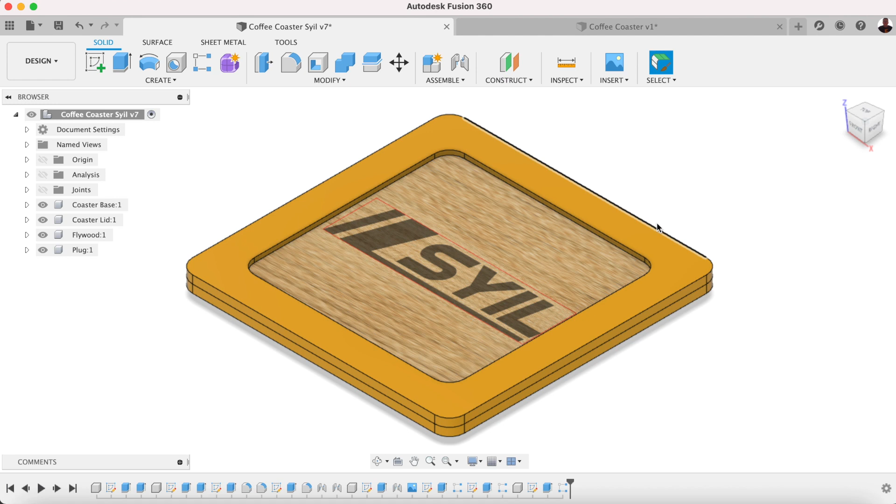Okay, let's get started modelling this 3D printed and laser engraved coffee coaster. Now the first thing you want to do here is to create a new design, and we're going to save this here. We're going to call it demo and save.

Rightio then. First of all, because this is an assembly, we need to click on the parent file up the top and create a new component. We're going to call this one base and click OK. We're going to create a new sketch and we're going to click the ground plane.

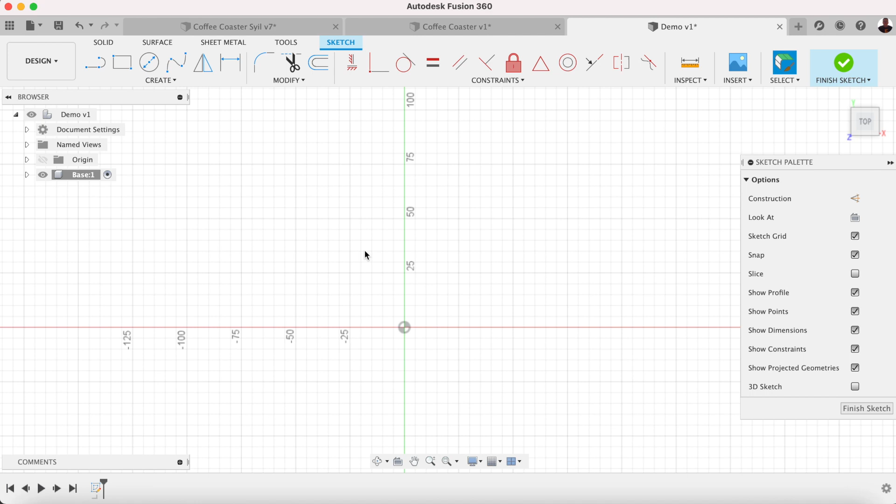And we're going to want a rectangle. We're going to use a center rectangle here, snap to the center and drag out. Our model is going to be a physical size, I believe it's 110 by 110. Enter. And fit that on the drawing. We're going to do an offset chain and bring that in. And that's going to be -6.5.

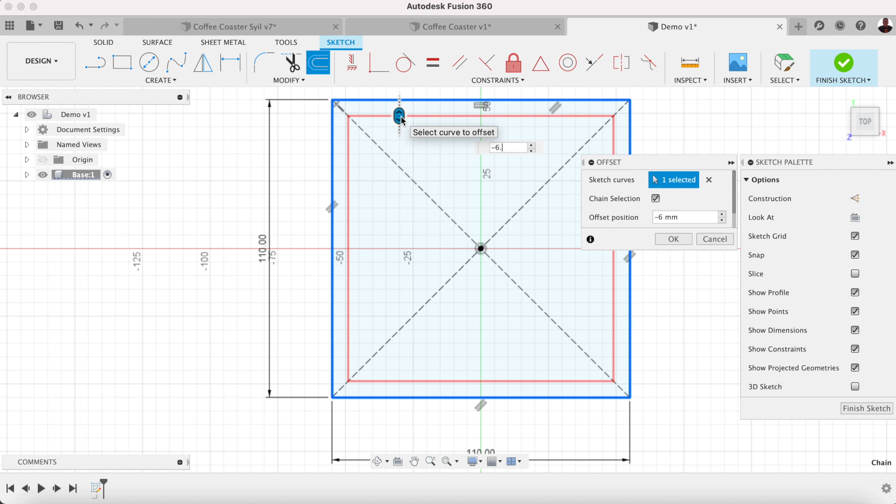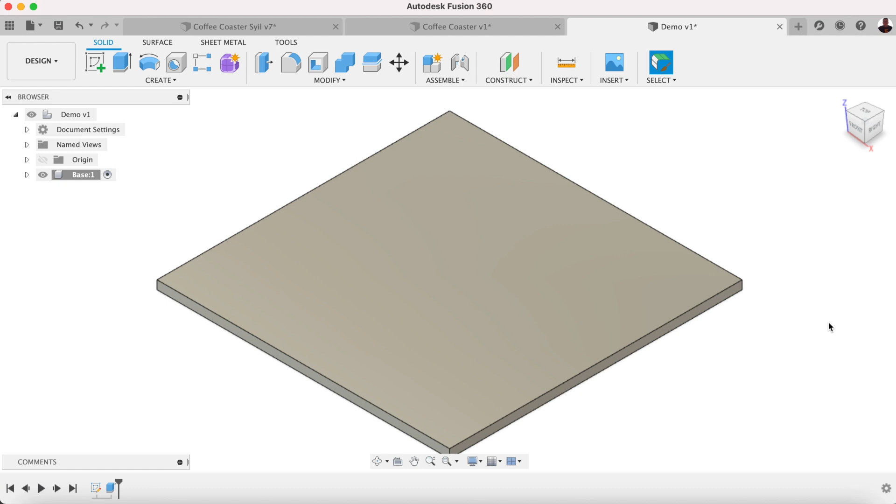We can now finish sketch and we can extrude that, E for extrude. And we're going to pick both of them and we're going to go down negative, I believe -3.25. And click OK. We need to activate that sketch that we did, so let's expand those and activate that and press E for extrude and pick that middle one and drag it down here. -1.5. So we can turn that sketch off now and collapse those columns there.

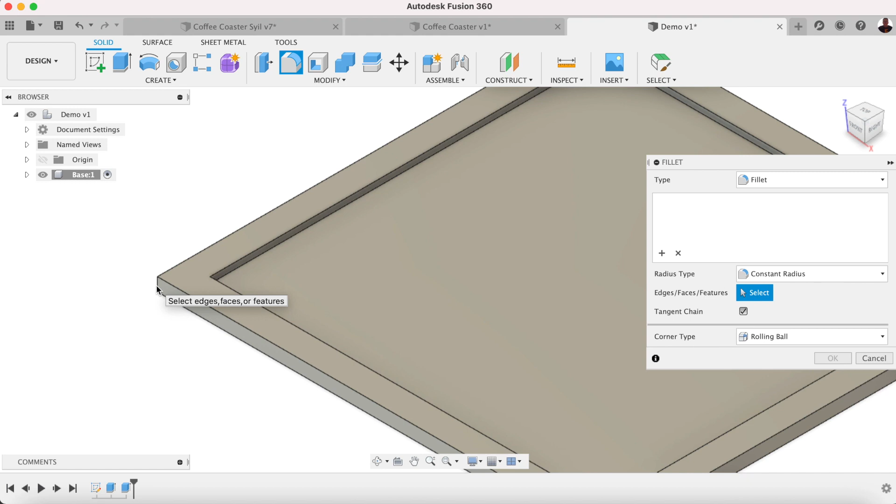We need to put a fillet on the outside edges. So zoom in. Sometimes it's easier if you zoom in to pick up your edges. In SolidWorks, you used to be able to click one edge and it would chain around, but Fusion doesn't seem to do that, or I haven't sorted it out. We want a 6mm fillet on the outside. We're going to fillet that 3mm on the inside.

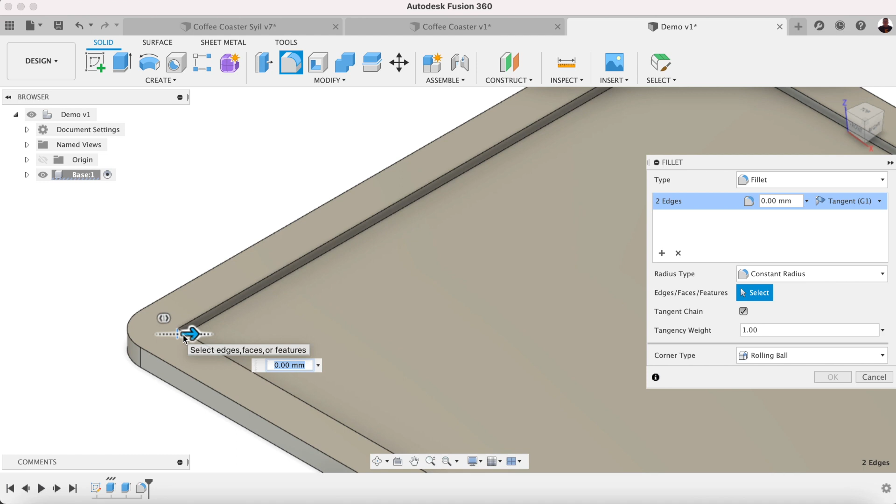So 1, 2. If this doesn't work for you, make sure that you hold the command key on a Mac or the control key on a PC. I'm doing this without holding any keys down at the moment, so 3mm on there.

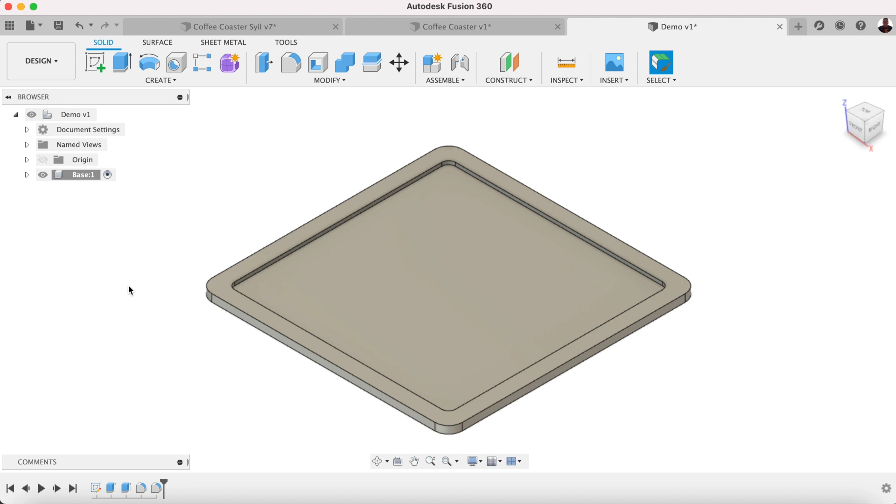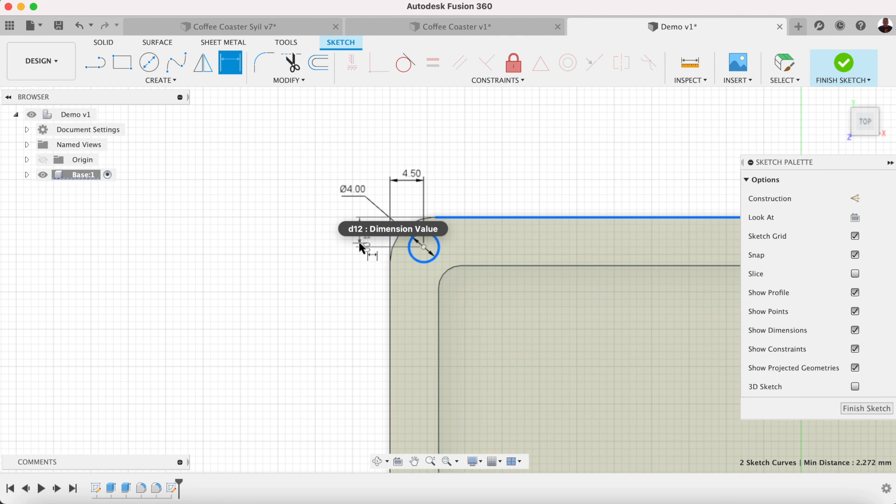Alrighty, so now we need to put in our holes. That will be our locating dowel pins that we'll also 3D print, so new sketch. Click that top face there, C for circle, and try not to snap it to any geometry. This will be 4mm, and it's going to be 4.5 in from the edge, and 4.5mm from the edge on the way down as well. Okay, 4.5, and we can finish that sketch and extrude that now. So we want an extrude cut to -2.5.

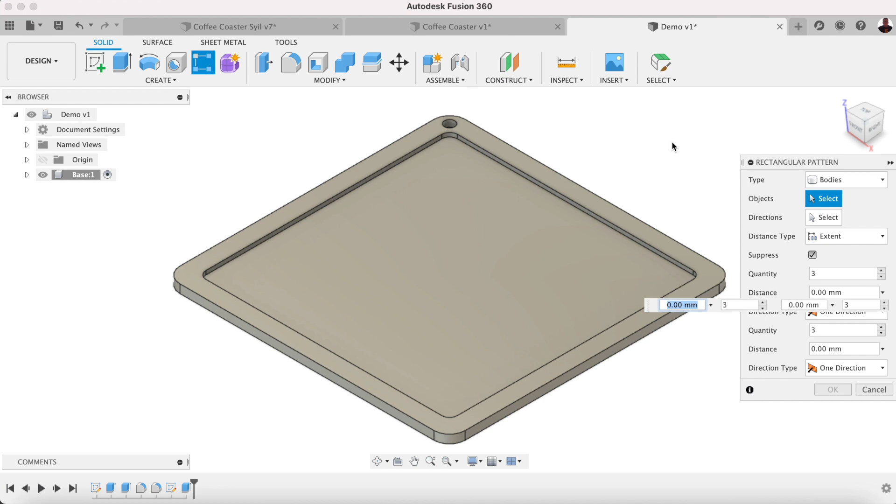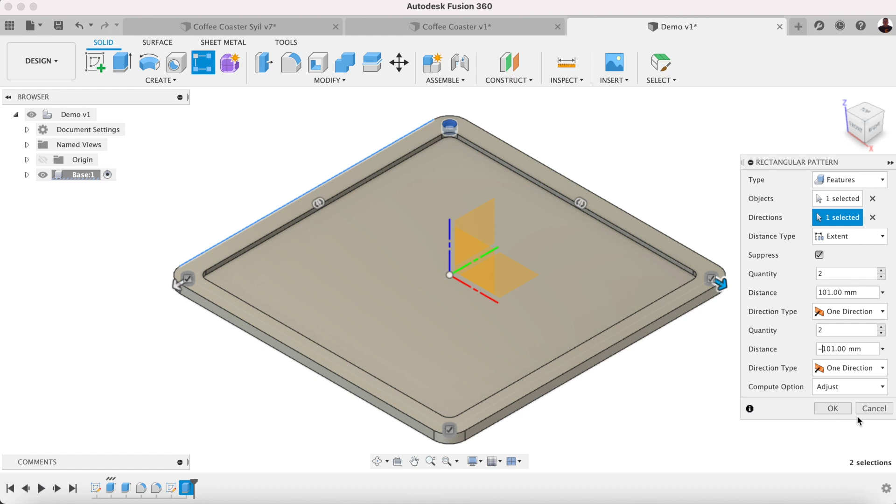Okay, so we're going to do a rectangular pattern now, and this will be a feature, and we pick that extrusion in the timeline. Then we pick the side edge here and we drag down. It's going to be just 2 at 101. And we want to go the other direction as well, and that will be 2 at -101. Oopsie daisy. Got an 8 in there. 101. Click OK, and we should have our 4 holes in there now.

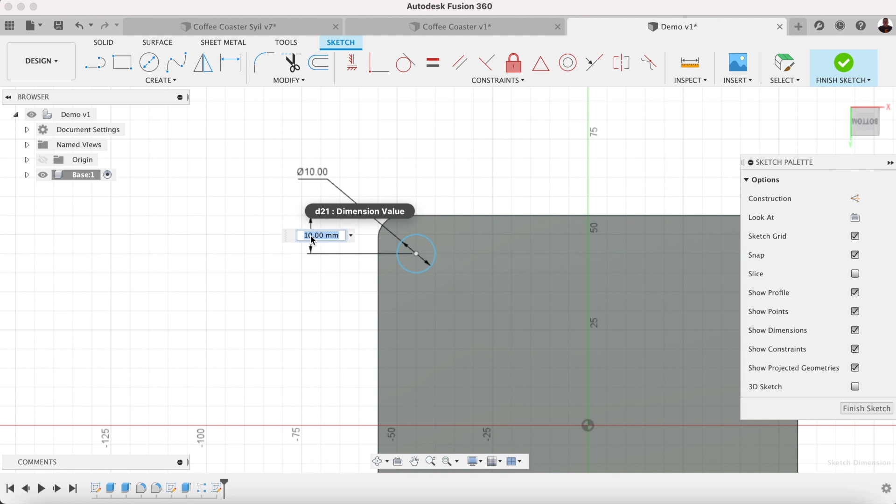Okay, so we're going to flick around to the bottom now, and we're going to put the little feet on. So new sketch, C for circle, and let's just put a little circle on here. This will be 10mm diameter and 10mm from the edge as well, and 10mm up from here. E for extrude, and that will be 3mm as well, and it will be a join. So we can have a look now. We've got 1 foot on there.

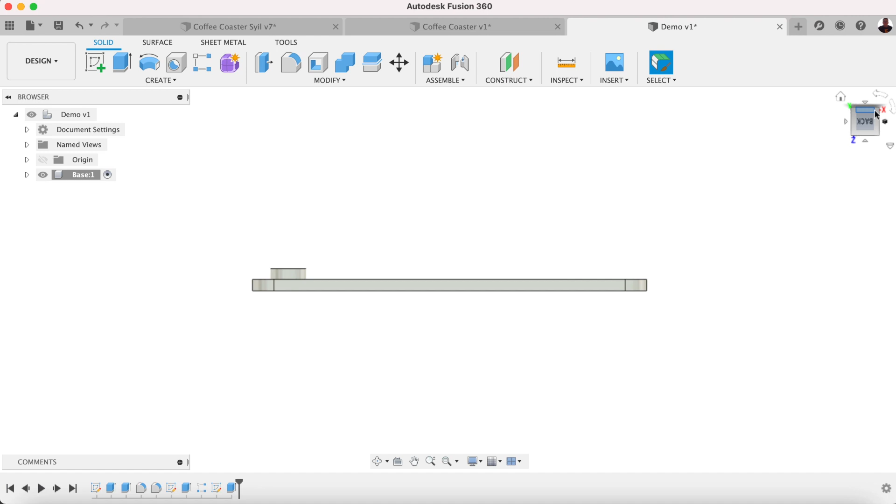Okay, so let's come back around here and let's do a rectangular pattern again. It's always easier to do a rectangular pattern using the feature rather than doing it in the sketch. That's the way I was taught by my good buddy Kevin Alexson, as it creates a Boolean operation, I believe.

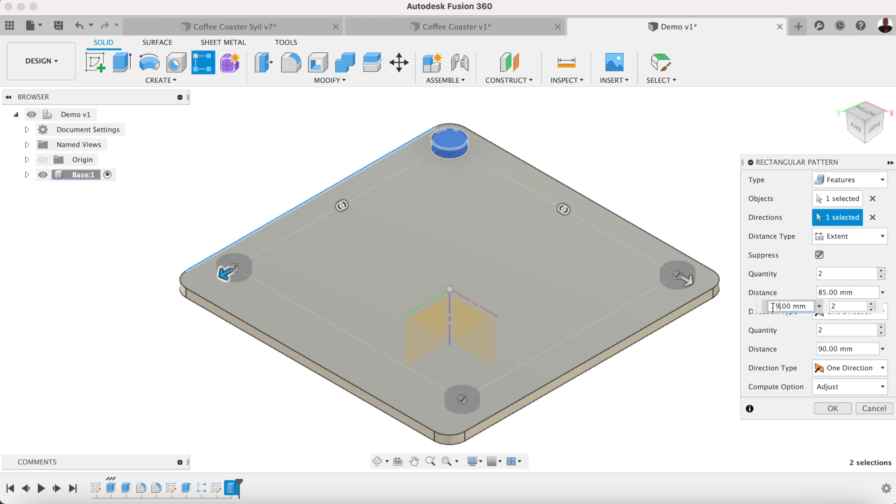Okay, and this will be actually 90. So 90 and here, and the top one as well. So this one here will also be 90, not 85. And there we have it. There's our feet on there, and we can come back over now.

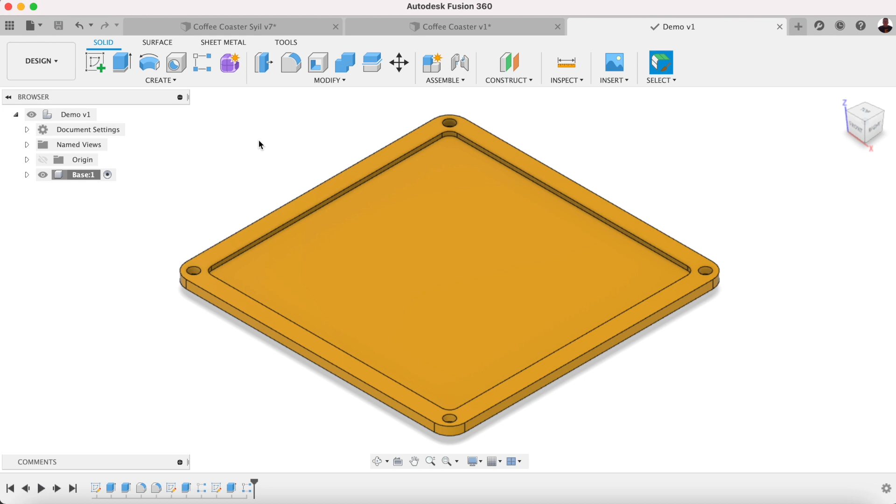So let's apply a physical material appearance to this now, and we want to type in yellow plastic, glossy plastic yellow, and we can just drop that on there and click save. Right, so let's do the plywood base. So once again, right click up the top, new component. We're going to call this one 3mm plywood.

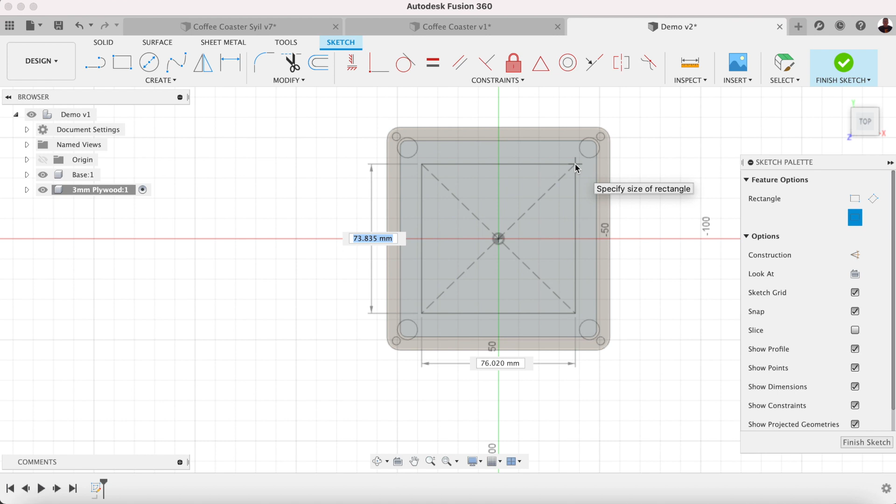We're going to create a sketch. We're going to click that face there, zoom out, R for rectangle, center rectangle, drag out. This will be 95 by 95. Okay, so we can extrude that now, and that will be extruded up in a positive direction, 3mm.

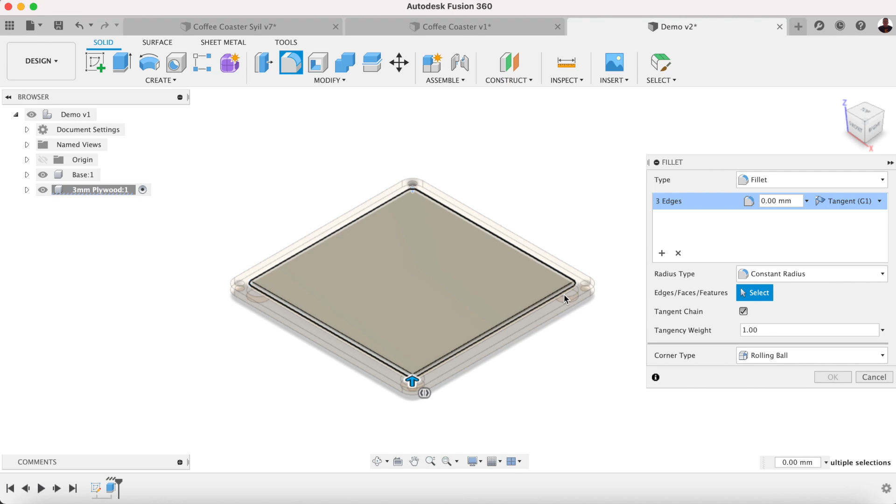Let's put some fillets on those now. These will be 3mm fillets on the corners of the timber. Remember to zoom in if you can't see it or can't find it. And over here, and that's going to be 3. Back to our ISO view.

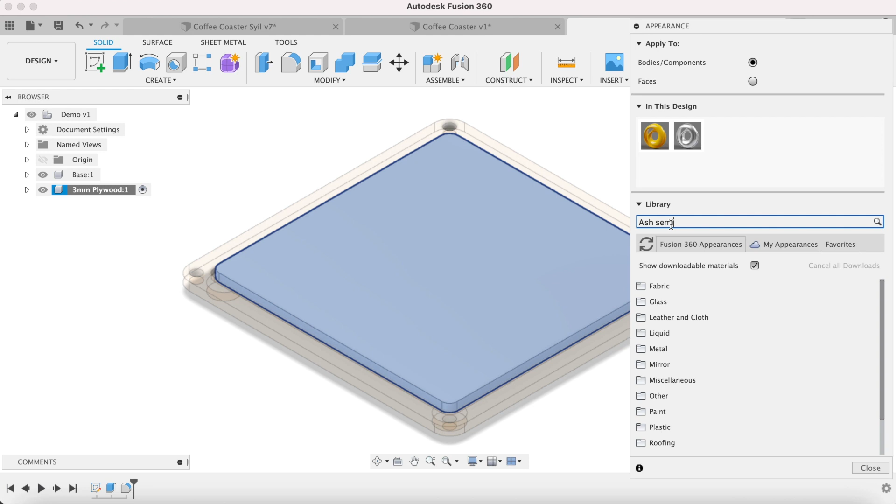Alrighty, so let's put a physical material on that now, and let's just type in here, I believe it's ash semi-gloss. Hit search, there it is there, we can drag and drop it straight on the timber. Okay, let's put our little icon on there now, our decal, and insert it from your computer.

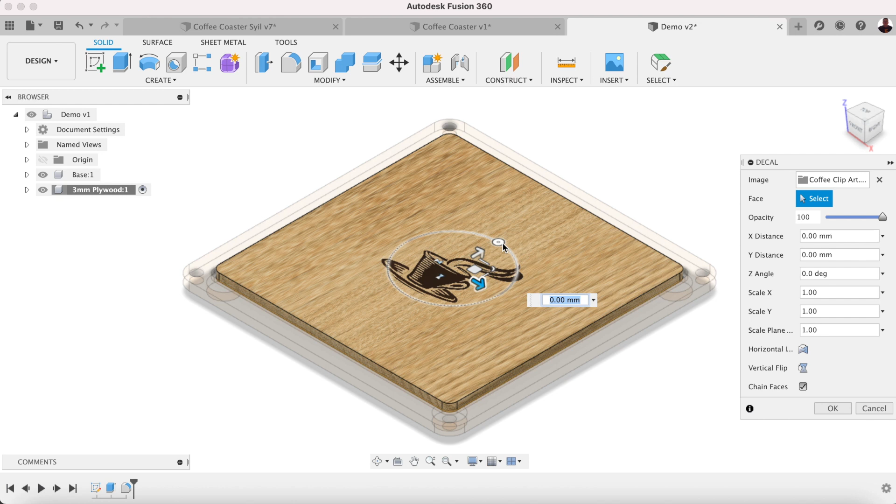Pick that top face there. I'm going to rotate mine around so it goes with the grain. May have to pop in on a top view here just so we can get it roughly in the center where we want it and to the size we want it as well. Not too big because we've got the outer lid to go on. It's going to look something like that. Okay, so now we hit save.

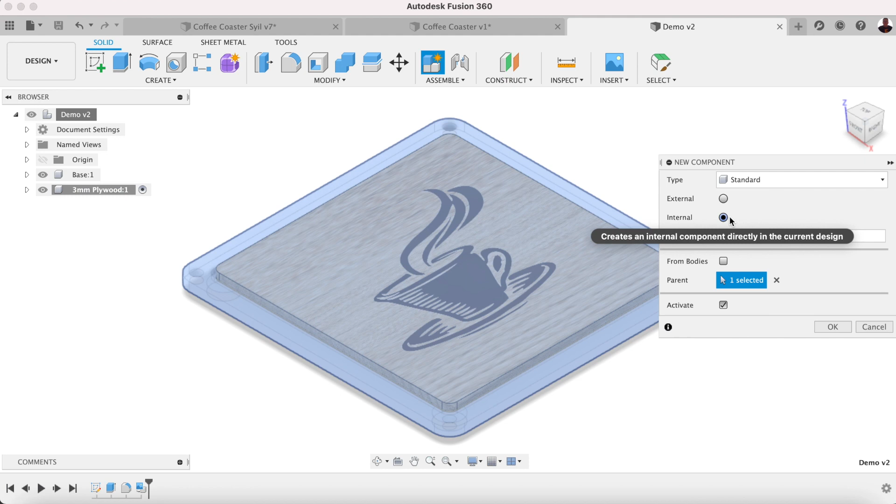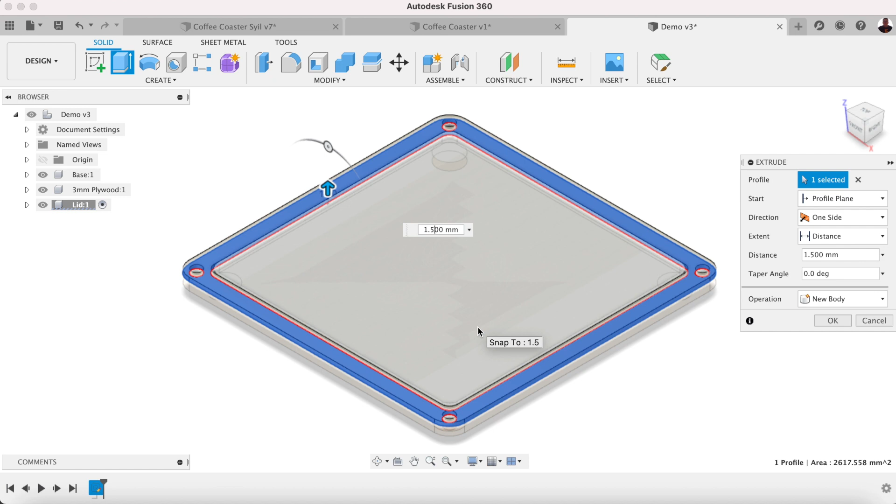Let's start on the lid. So once again, new component, and this will be lid. And we're going to pick a new sketch. We're going to pick that top face there, and pretty much while I've got that highlighted like that, I'm going to go extrude, and I'm going to extrude that up 1.5. Alright, there we have it, and that should be level with the top of our ply now if we just check it. Yep, it certainly is.

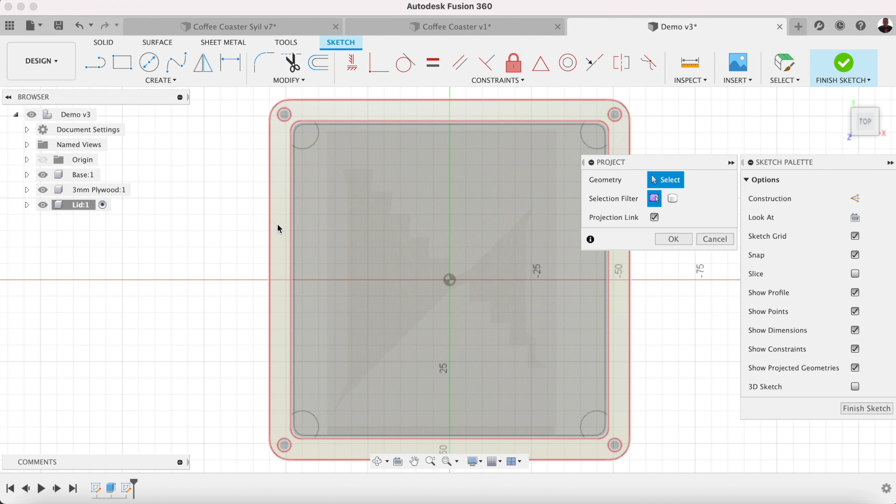Alright, so now we're going to create a sketch again and pick that top face. And this time now we're going to do a project include. So create, project include, we want project. I want to capture those edges there and click OK. Now I want an offset from that one there and drag it in. And that offset is going to be negative 12.5. I'm going to click OK.

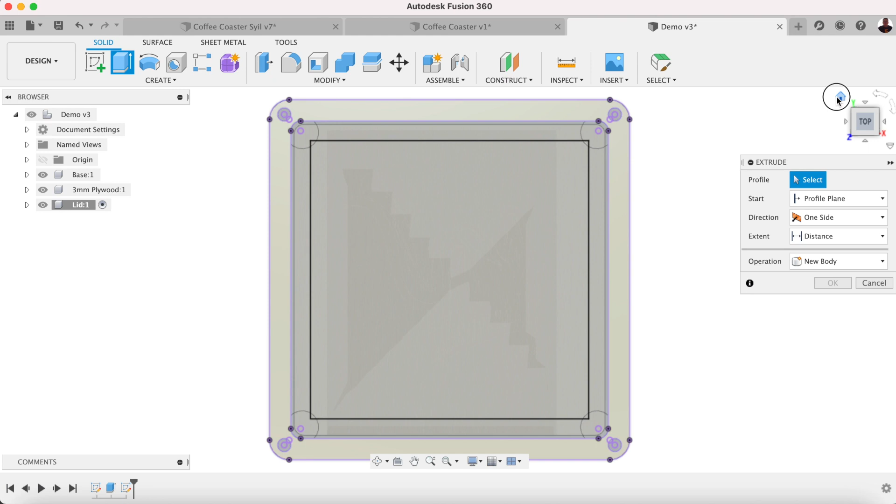We can now extrude all this information here that we've gathered. So we're going to pick that and the little round circles as well. Okay, and we can drag him up, and we're going to type in here 1.75 and click OK.

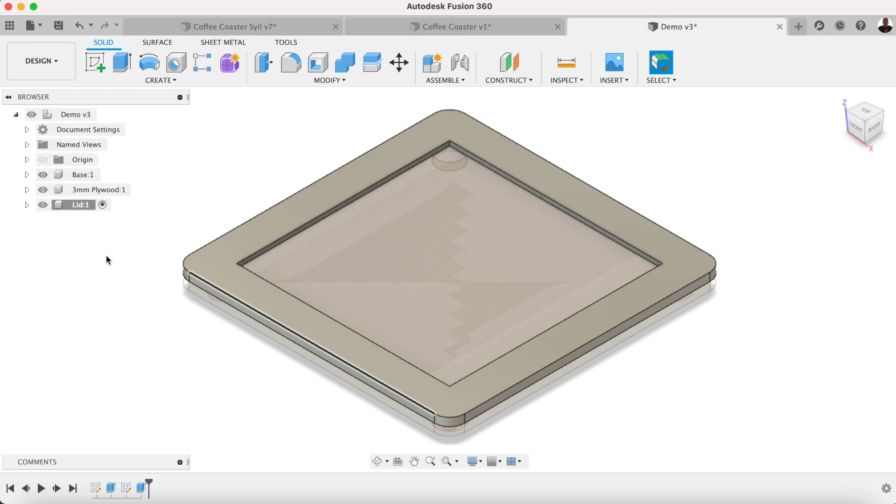Alrighty, so let's put a physical material on that as well, an appearance, sorry, and we'll drop this into the tree on that one there. And if we activate this at a parent level, you can see I've got most of my components. Nothing's locked in yet, so I can undo that.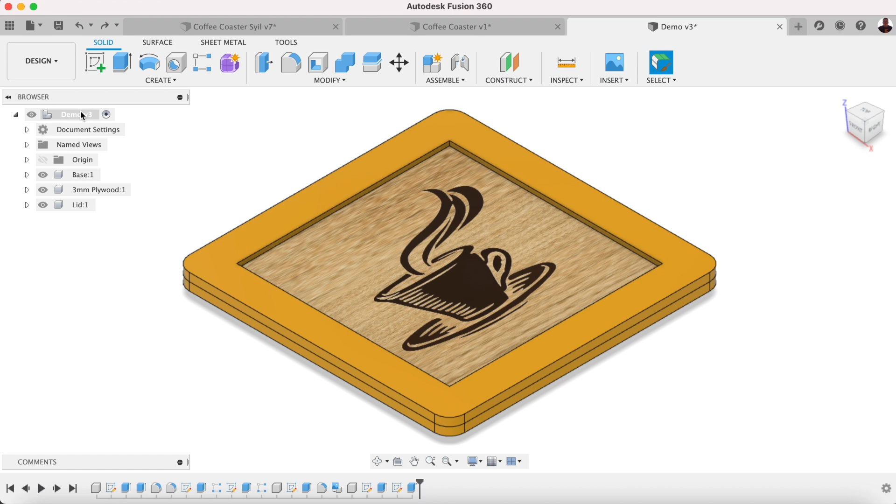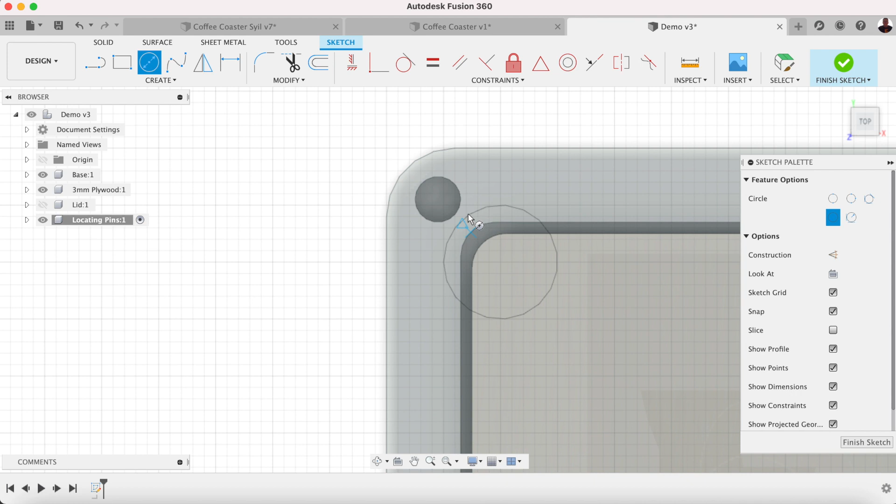Alright, so let's put the pins in now. Okay, so right click at the top and new component, and we'll call these locating pins. And click OK. Righto, so we can turn off our lid for now and create a new sketch. We're going to pick this top face here, C for circle, and we want to find the center of that circle and see it snap to that there. That's what I want. D for dimension, and this pin's going to be 3.5.

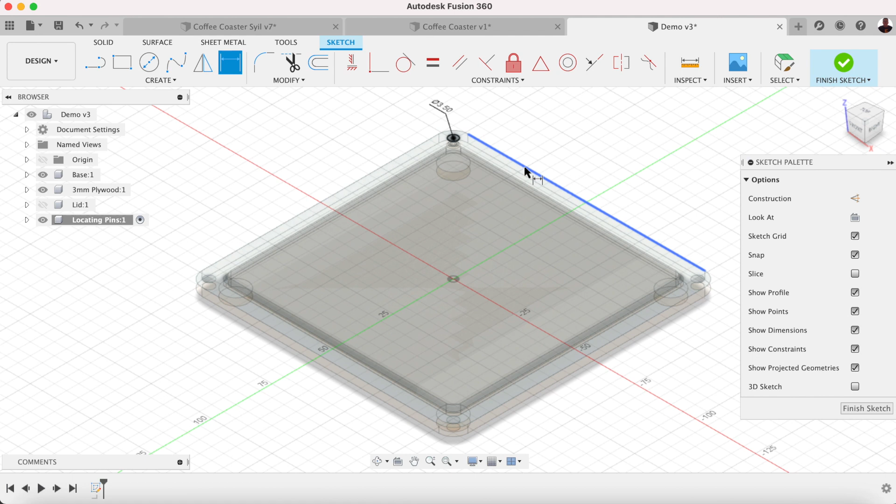Remember, it's going to be 3D printed, so depending on your 3D printer and the tolerances it does, mine's a give or take, so I made mine a little bit smaller. It's going to be super glued in anyway. E for extrude now, and we can extrude this symmetrically, so the distance of the pin will be 2. Okay, so overall the pin will be 4mm, 2mm top, 2mm on the bottom.

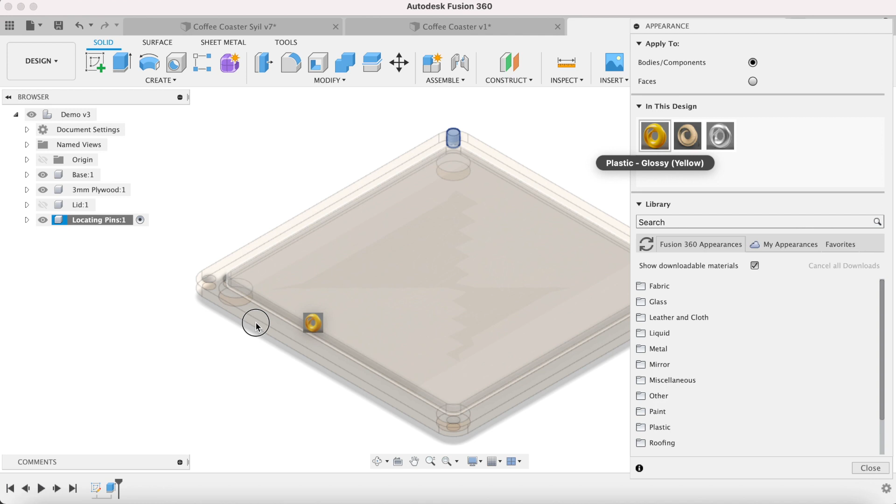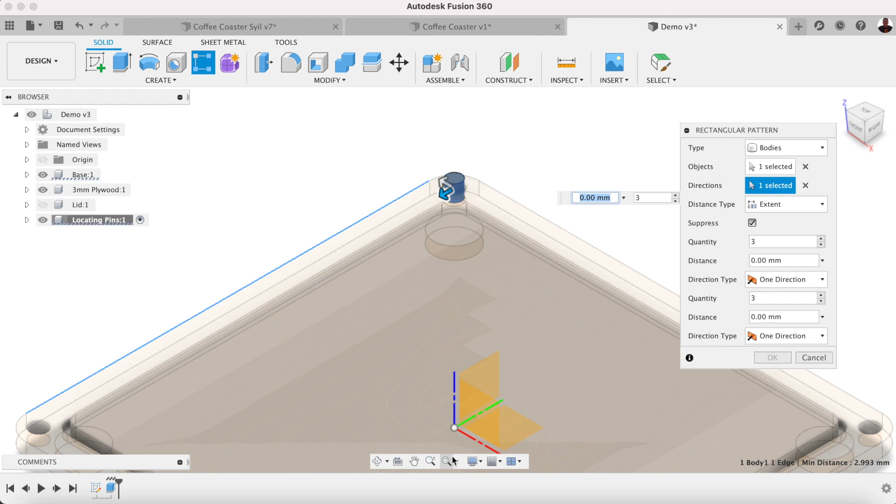I'm going to put a physical appearance on that straight away as well and drop that on the tree. Alright, okay, so what I can do now, rectangular pattern. Now instead of being a feature, this is actually going to be a body, all right? And I want to pick that body there. So if I pick it here, it should be selected now. Direction, I want that one. And if I just fit that, auto scale it.

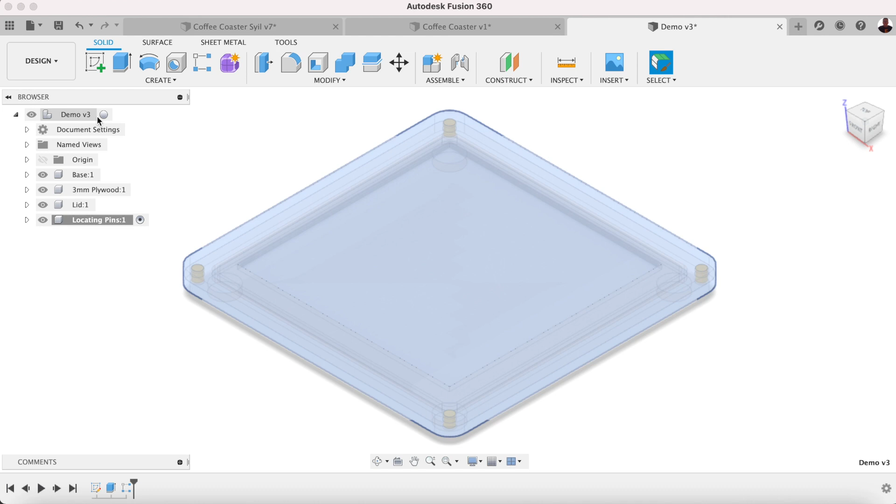2, remember that distance was 101. Okay, and in this direction, it was 2, and it was negative 101. All right, click OK, and there's my pins in situ now. And let's put some joints on this, okay? So assembly, and we're going to go rigid group, and these are going to be rigid group. Click OK. I'm going to turn off my lid now, and now I'm going to put a rigid joint, okay?

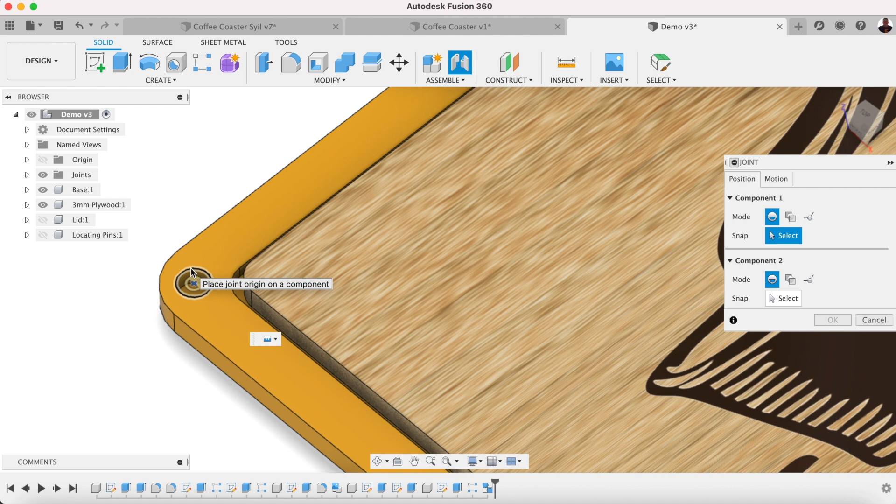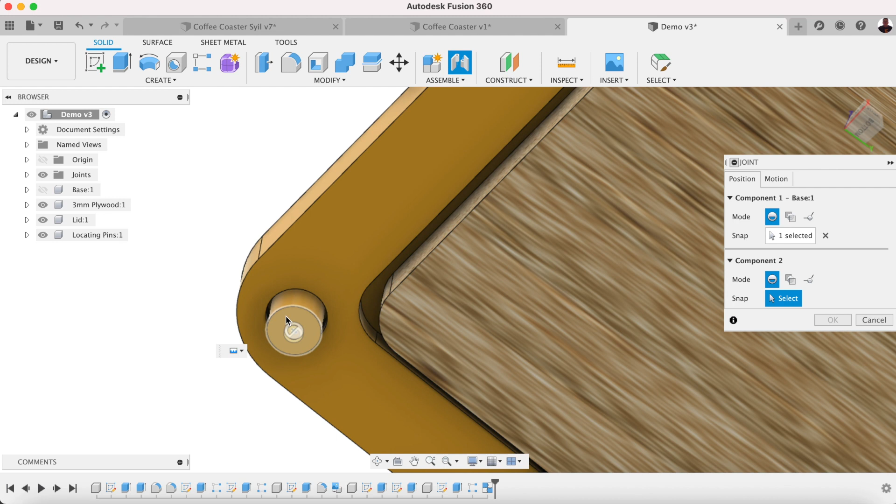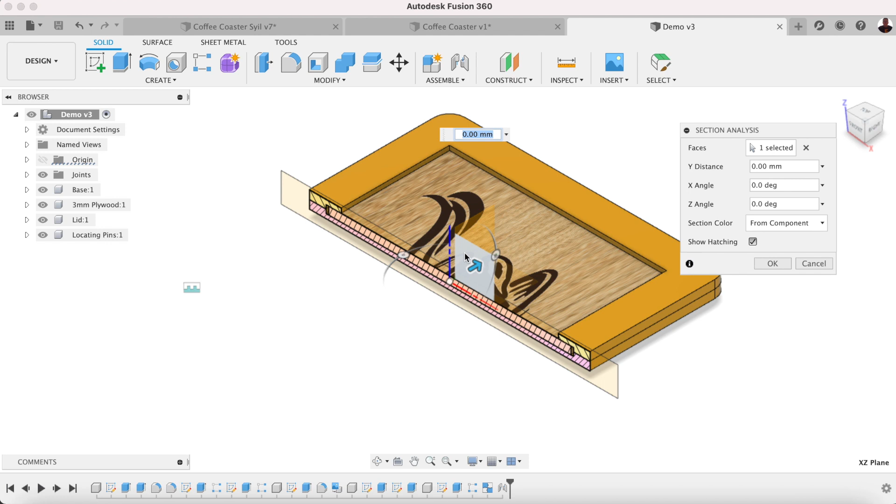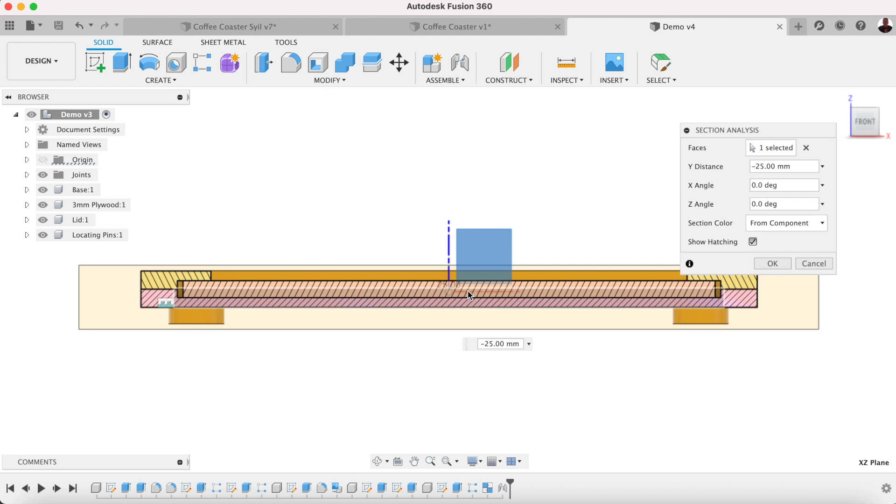Let's save that. Let's do a section analysis and just see how those pins look now. Okay, so inspect, section analysis, and I'm going to pick that mid plane there, and I can just gently drag out here and check everything. Let's go to a front view here, and you can see that everything looks good from there. Come back in a little bit, and let's take a look at the side view now, and we can see our timber has been encapsulated by the lid and the base, so that looks quite good. If I come back up here now and set this back on 0 where it was and click OK.

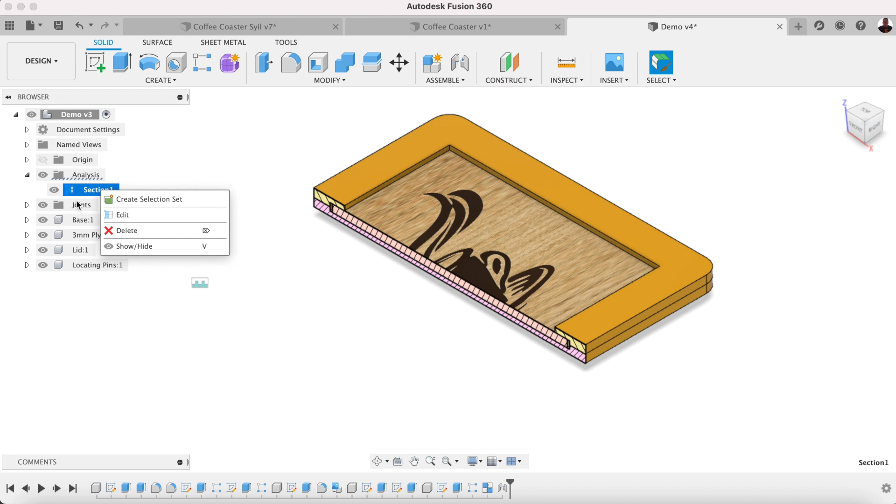Okay, now we can turn off our section analysis by clicking on the eye, and at any time you want to modify your section analysis, remember to expand the drop down box, right click, and you can edit it there as well. Okay, so I'll just turn the eye off for now. Alright, okay, save your work.

Now you want to 3D print this, so you'll need some STL files. It's quite simple, there's your components, what you need. What I love about Fusion, everything's in one file now. I've got 4 components and an assembly, everything's together now. Some of the other CAD systems, the old CAD systems, this would have been 5 separate files: 4 parts and 1 assembly file. Fusion's got everything in one file.

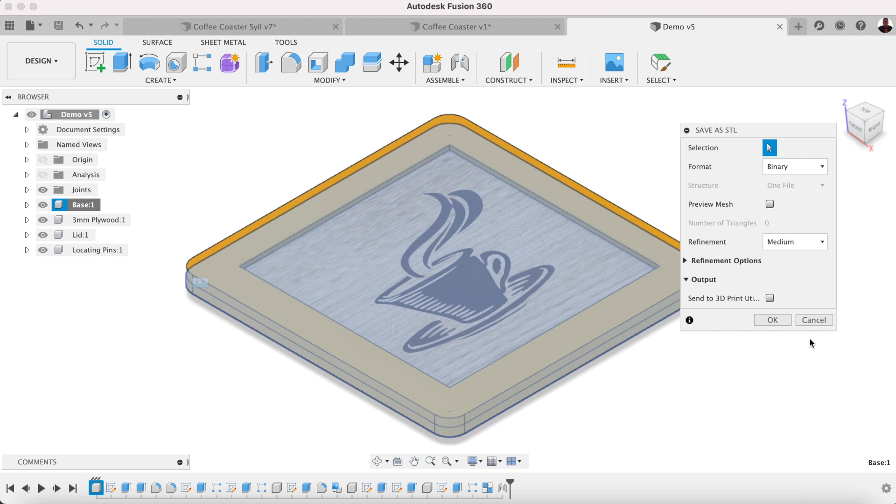So we right click on the base, and we're going to go save as STL. Set up what you want here, click OK, and drop that into your folder, and then bring it into your 3D slicing software, Cura or whatever you're using, and start printing. So let's head on over to my 3D printer and my little Muse laser engraver, and let's start making this.